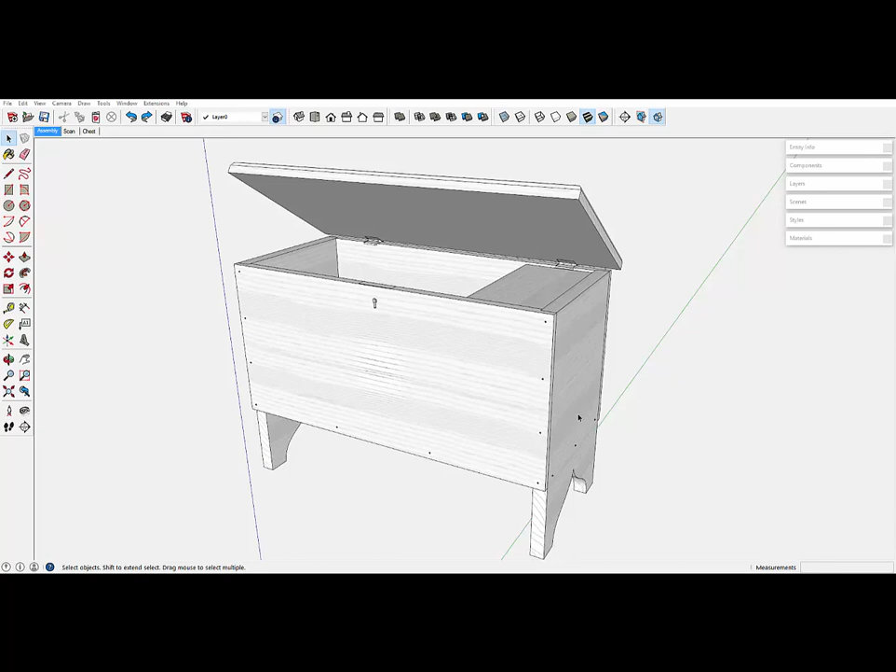Box locks or key locks are sometimes quite tricky to install. In this video, I'll show some of the procedures I do to help with installing the box lock.

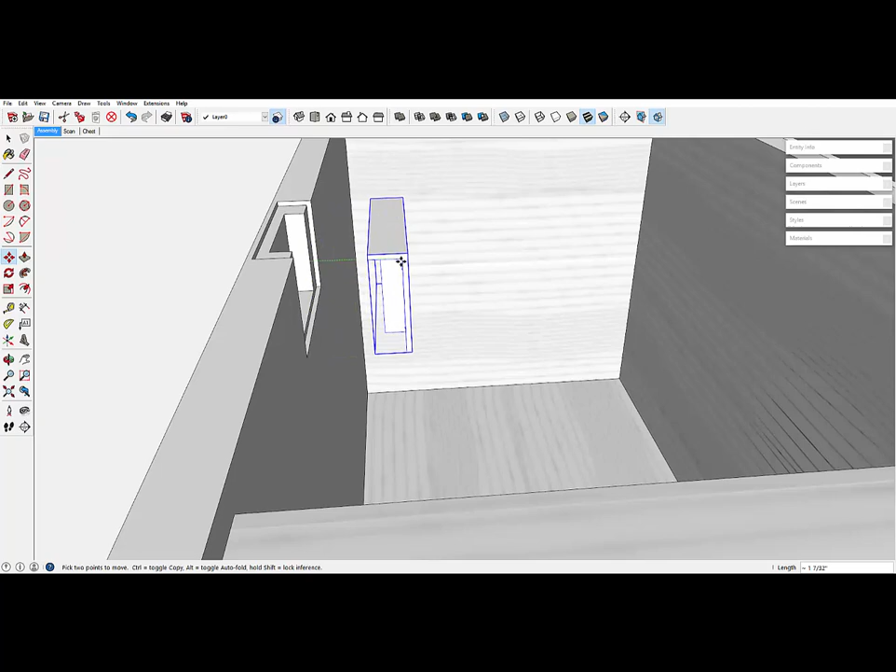Here's a small chest with a small key lock, a brass key lock, and you can see the intricate cuts required in the chest front to accommodate that lock.

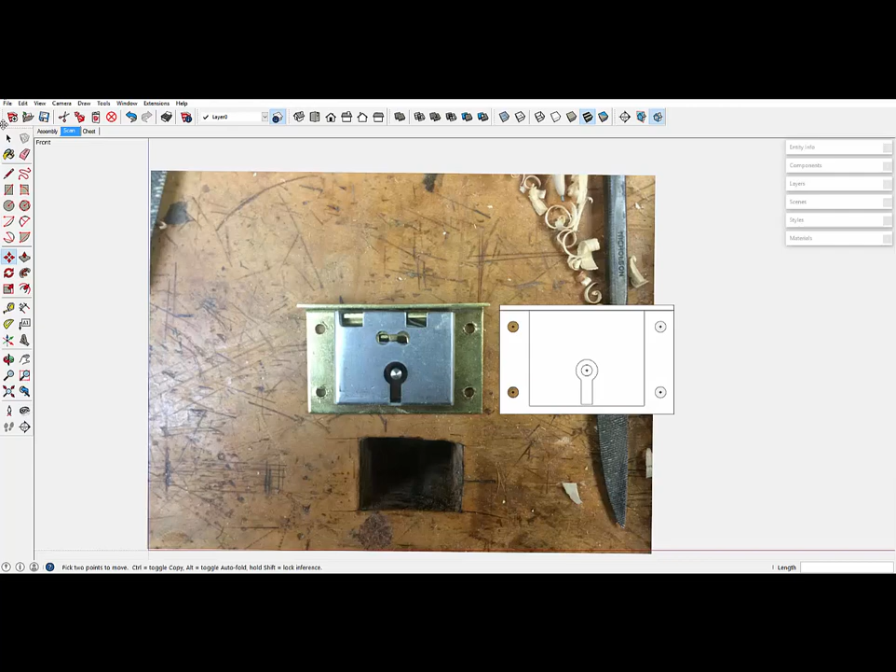So I typically model up the actual key lock that I'm going to install, and I would take a picture of it and then create an actual model from the picture, as shown here.

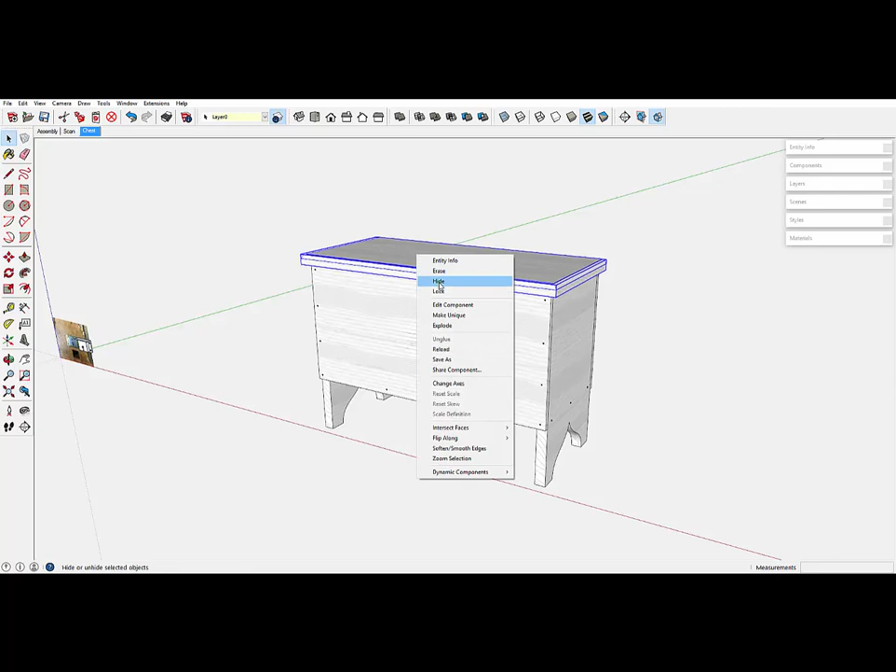Now let's move to the chest without the lock installed, and I'll hide the chest top so that we can get access inside here, and bring a copy of the key lock over to the assembly.

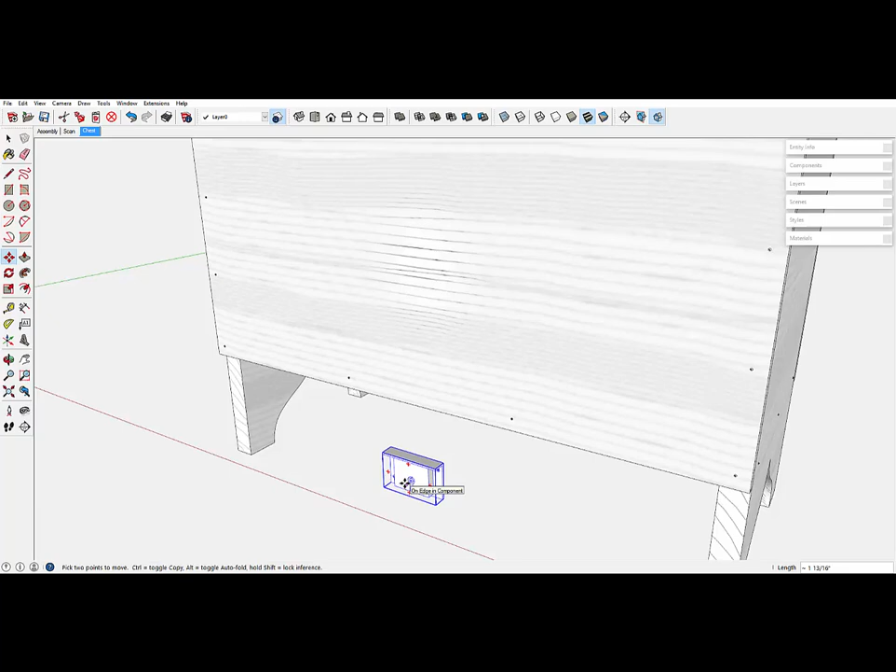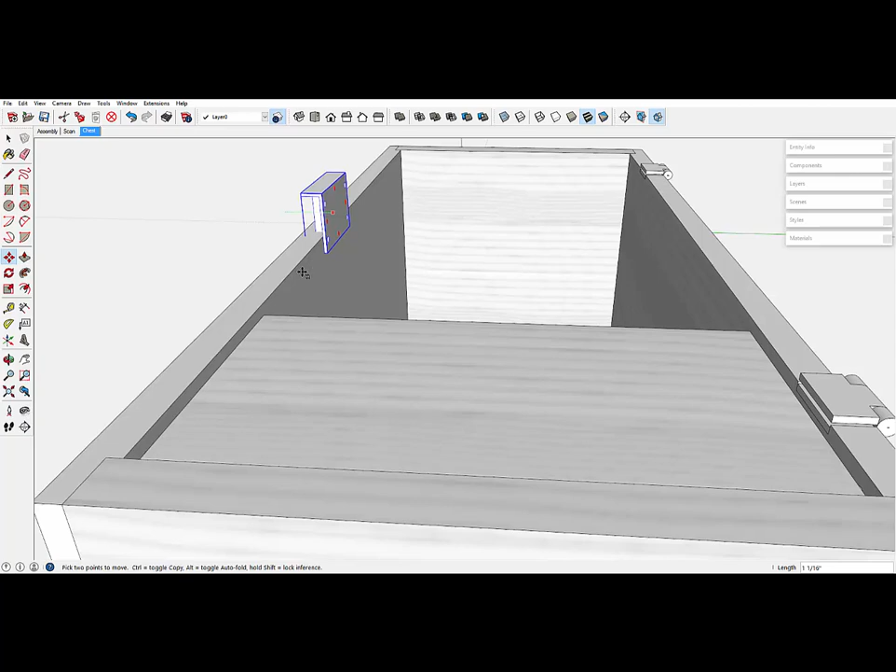Now to move it into position, it's going to take several moves here. I'll pick the midpoint of the key lock and tie that in with the midpoint of the chest, and then on the blue axis raise it up about here, getting closer to the position, and then come around on the green axis and pull it in on the green axis. I'm using the arrow keys to hold the movement in these red, green, blue axes in this case.

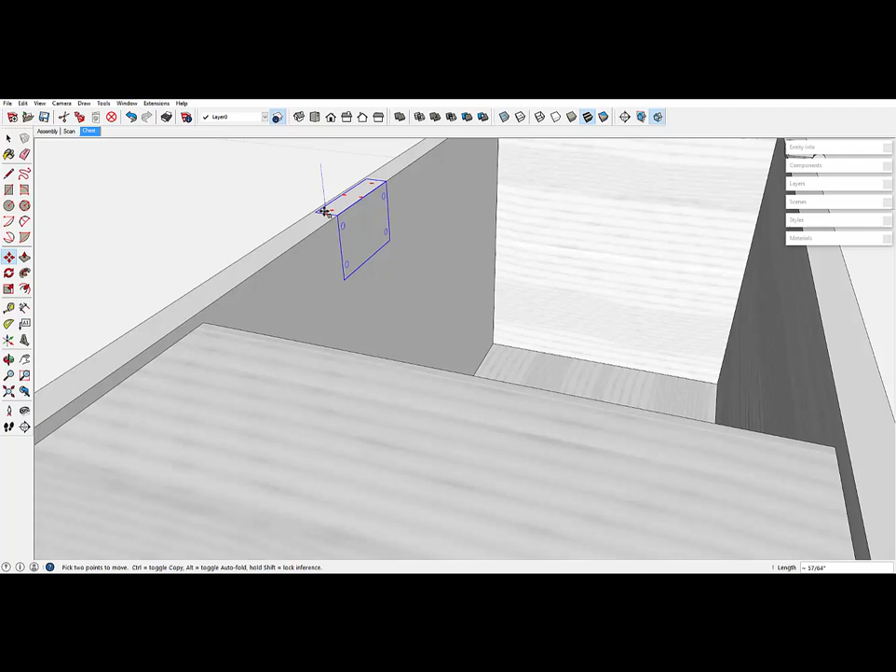And then now to push the key lock, embed it in so that it is flush, and then come down again on the blue axis with a down arrow key holding it in that position until it is embedded in and flush.

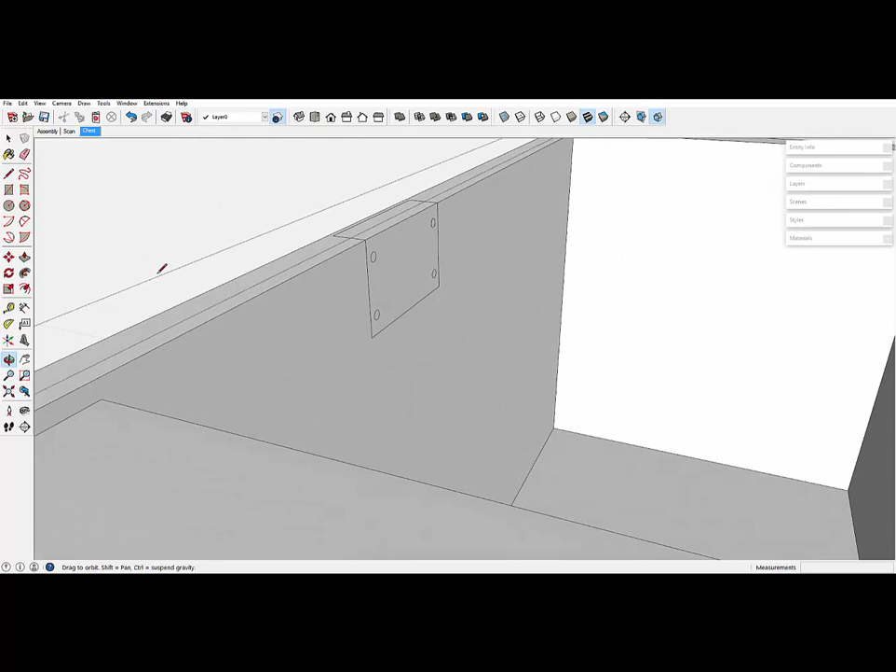So it's in position. I can use the lock now to create the cuts, the intricate cuts in the front panel here. So I can draw around the border of the key lock.

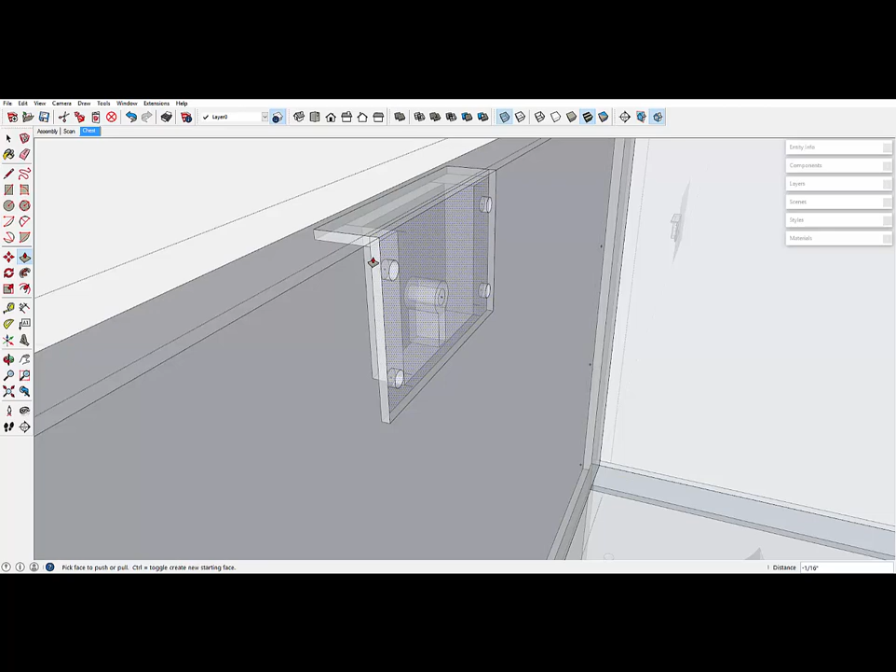And I'll turn on X-ray and then use the push-pull tool to push out that 1/16 inch recess for the thin part of the key lock so that it is flush.

So now I've got one of the cuts done, but inside the key lock is this other rectangular section, and I'll draw around the border of that and use the push-pull again to push back the recess for the inner part of the key lock.

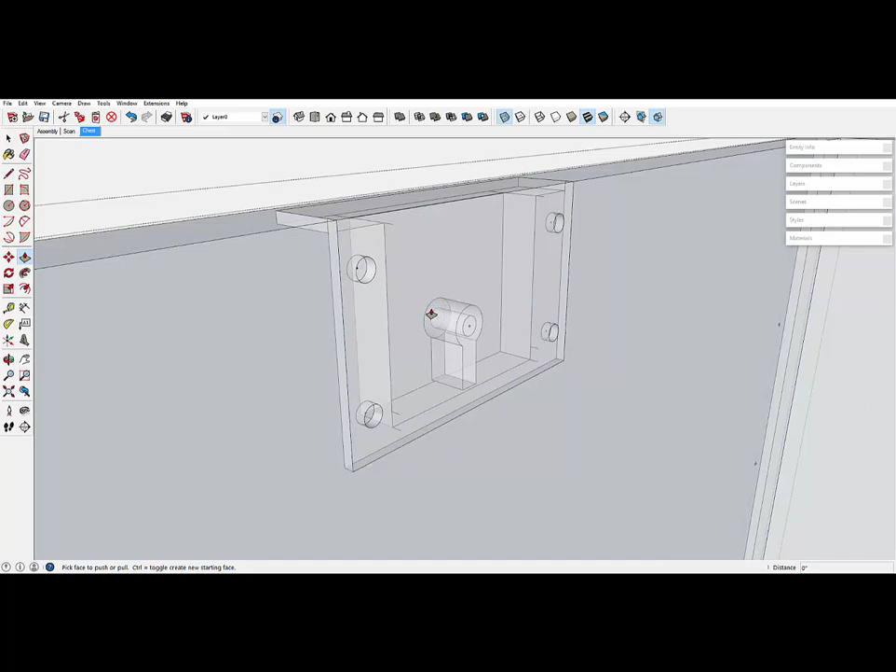A couple more things to do here with the circle tool. Here's the key position of where the key actually enters the key lock. Measure that carefully because it's critical. It is a critical position in the chest front.

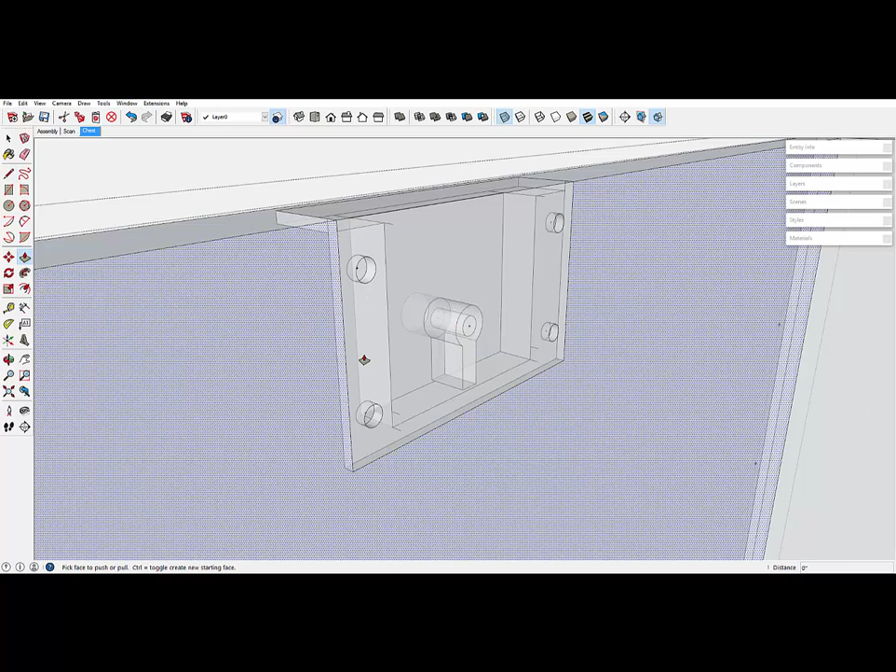And I'll push that hole out through the front, and then there's the other rectangular section so that the key can enter, and I'll push that, double click that, and push that out towards the front.

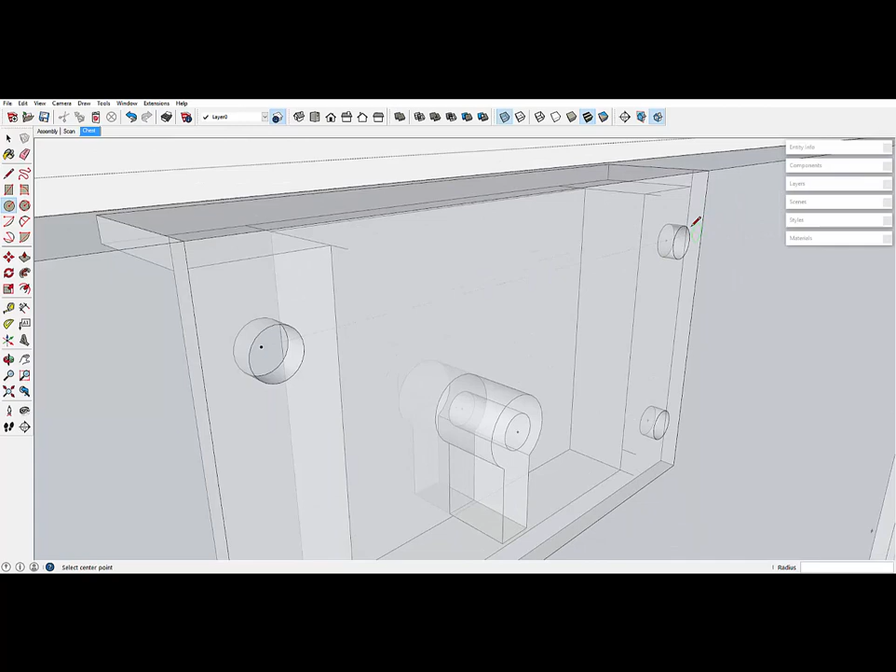I also like to show where the screw holes are located. And I need to find the center. I've got a little guide point there on the key. Pick that and draw a little circle on the face.

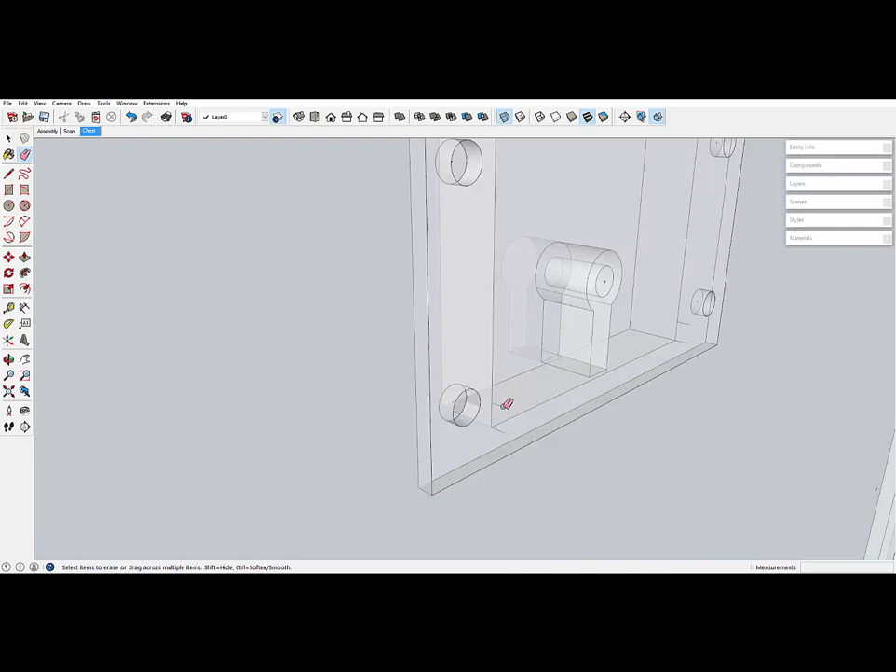These are 1/8 inch diameter, and that should be all the cuts that are required.

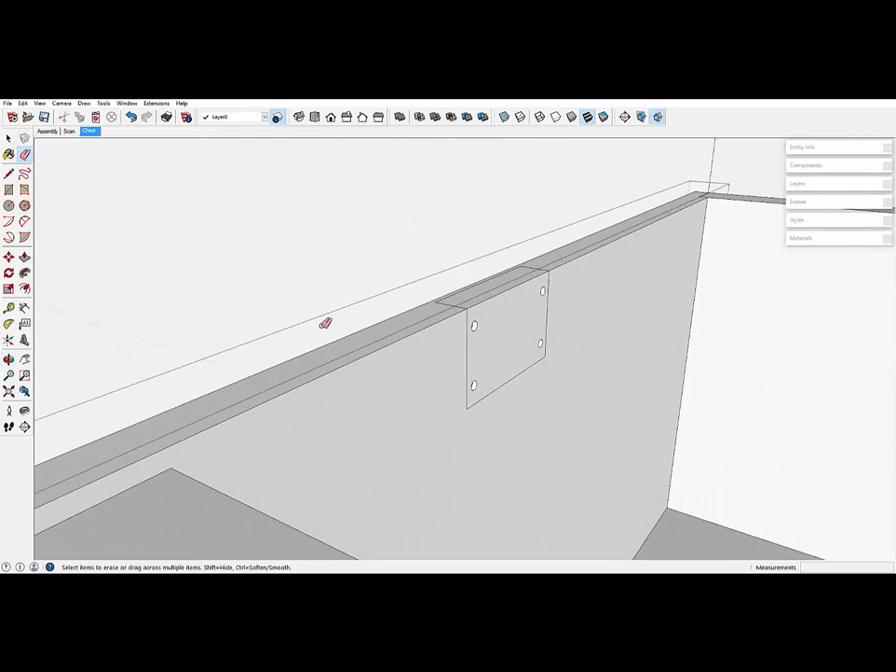I'll close the component, turn off X-ray, and move the component. I need to close the component before I try to move the lock.

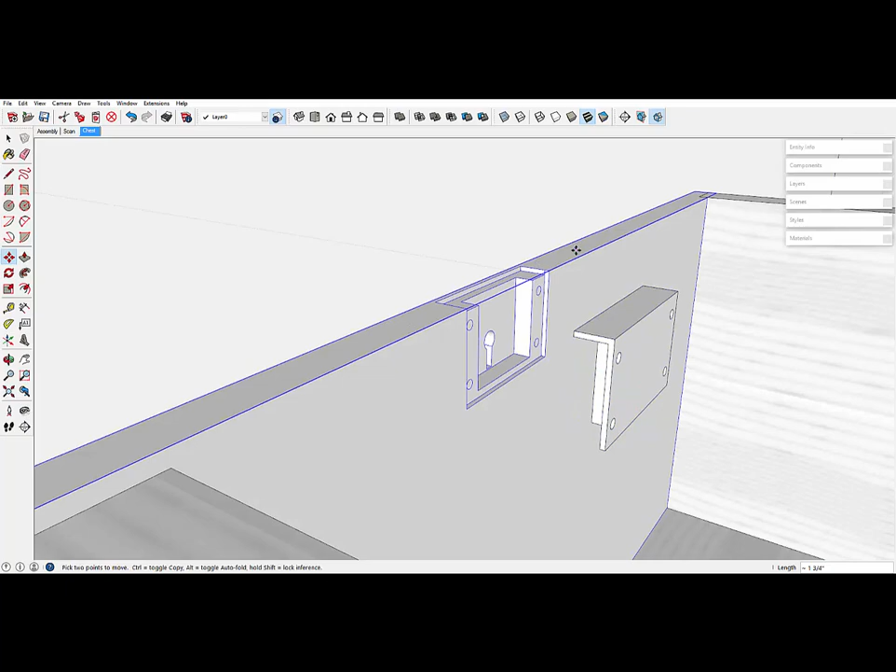Now I can shift the lock back on the green axis to expose the recesses. Then I can mark out very carefully using these dimensions on the actual lumber and cut that precise recess.